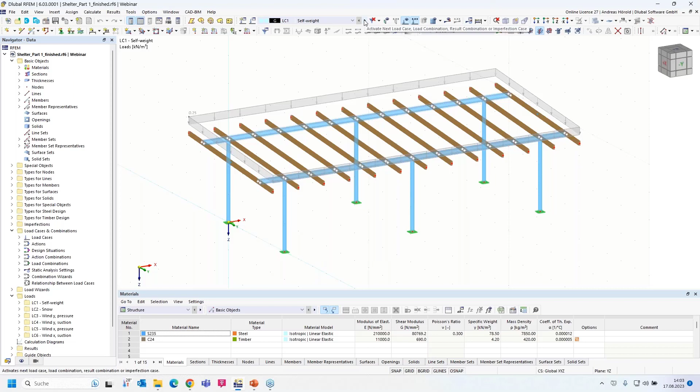Then I open the program. That's the state from the first part of the webinar that we presented last week. I created this model and the different load cases: self-weight, snow, 2 wind load cases in Y direction and 2 wind load cases in X direction. I go back to the base data, what we selected last week.

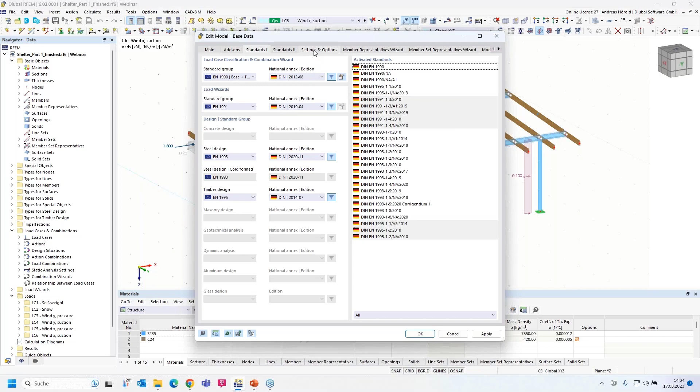I activated the 2 add-ons, one for steel design and one for timber design. Also, the combination wizards are checked, and I selected the different Eurocode standards with the German National Annex. And under settings and options, I activated the member representatives and the member set representatives.

I would like to design only one representative, for example, and all members that have the same properties, the same length, for example, same cross-section, are collected in one representative, and I design only one of them. So in the member representatives wizard, all steel and timber design properties are checked, and the same for the member set representatives. Okay, I'll leave the dialog and I start with applying the imperfections.

On the left side, you can see the navigator data and then the folder imperfections. At first I have to select or create an imperfection case. I can do that with a right click and then new imperfection case. The imperfection case collects the imperfections. After the creation of the imperfection case, I need to create the imperfections. The main advantage of the imperfection case is that you can create a group of imperfection cases. That's, for example, necessary for buckling design according to the GMNIA method. And that's the main advantage.

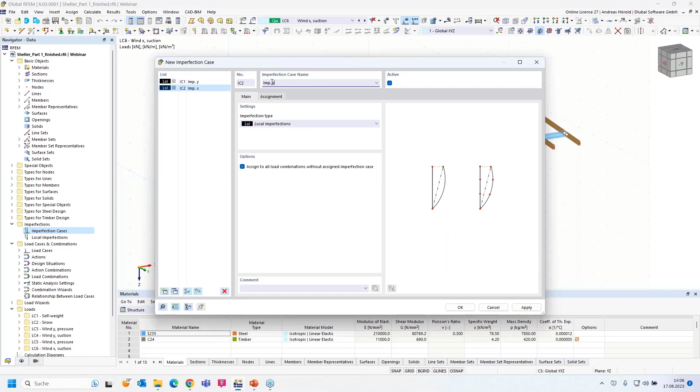So I create the imperfection case imp y and assign this imperfection case to the wind load cases 3 and 4, the two load cases with the same direction y. Then on the bottom left, I check create new imperfection case. I call it imp x and assign the wind load cases in x direction.

And you can see in the combinations in the background, the combinations are created automatically, and you see only the combinations with wind load cases 5 and 6, and not with load cases 3 and 4 anymore. You can check that here. Same for imperfection y. You can't see any combination with the wind load cases 5 and 6. Only with 3 and 4, and of course the other load cases, load case 1 and load case 2, the snow load case.

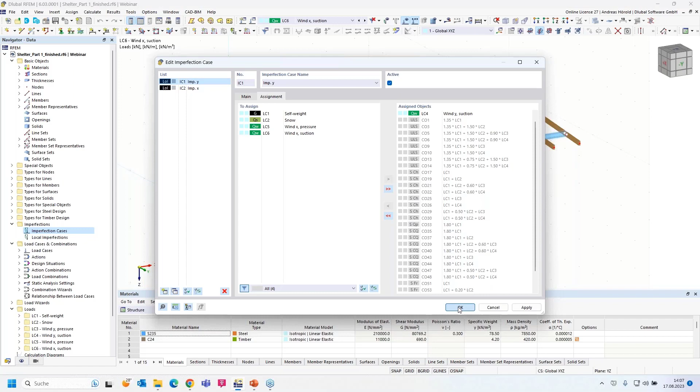Okay, I leave the dialog, and then if I go to the navigator data, I can open the local imperfections, and for example under the folder imp y, I can create a new member imperfection. With a right click on it, I can select new member imperfection. The other way is to go above here and select the button new member imperfection.

So the right imperfection case is selected. I would like to create an initial sway. I would like to assign the initial sway to the steel columns, and I will use for the steel design the equivalent member method in combination with imperfections and calculation according to second order theory. That's sufficient for the design according to the equivalent member method.

Okay, this definition type, Eurocode 3. So the coordinate system is local. Okay, I forgot to show the member axis systems. I select Y. I know that from the test. So then I measure the structure height.

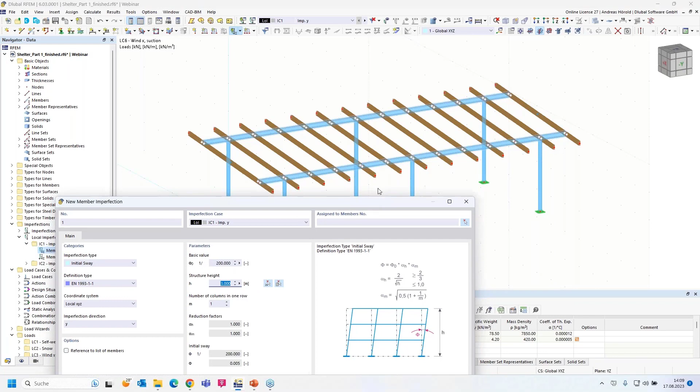Measure. I measure the longer column. Doesn't matter that this column is a little bit shorter. 2 columns should be in one row. This one and this one. And I can press OK. And I need to select the different... Okay, I must go in the dialog again.

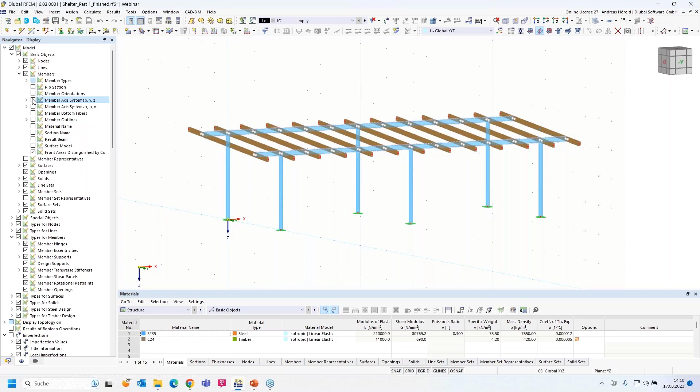But before I do that, I go in the navigator display. And then under members, you can find the member axis system. So now you can see the local member axis system. And now I turn back to the navigator data, double click on the initial sway, and you can see the local Y direction is the same as the global Y direction.

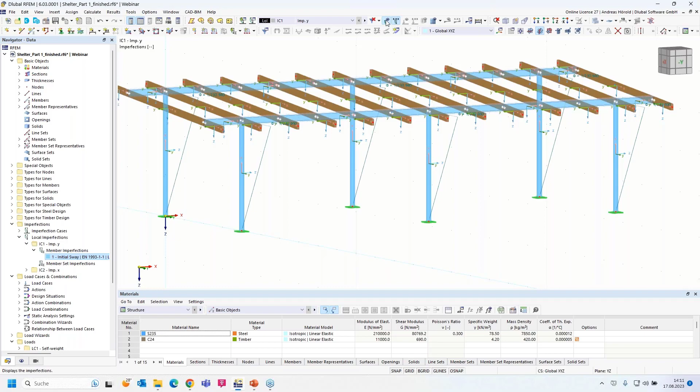So, and I assign the different columns. Okay. And I have to select this button above, show imperfections. So the imperfections are created correctly. Then the next imperfection, new member imperfection. This time I have to select the imperfection case 2, imp x. Again, initial sway according to Eurocode 3.

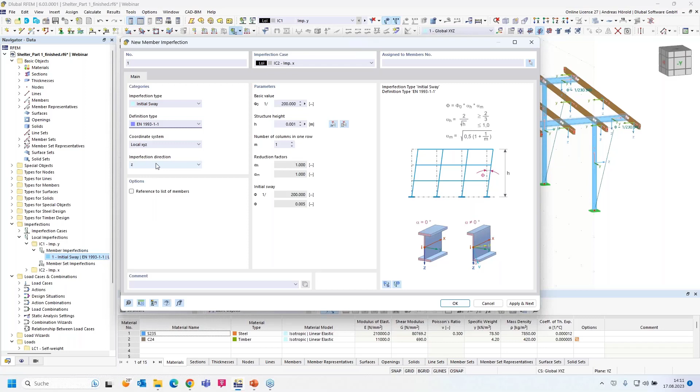This time imperfection direction Z. You can see this is the local Z direction. It's the same direction as the global X direction. Structure height is 3 and 3 columns in one row. Okay, and I select the different columns. So I select the other imperfection case, and you can see that the imperfections are defined correctly.

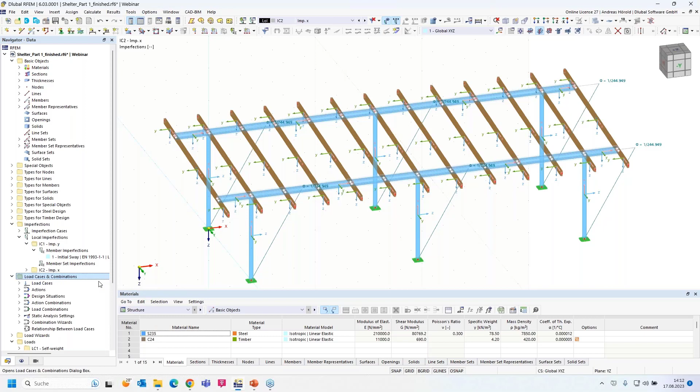Okay, then we can turn to the load cases and combinations. Here on the left side, navigator data. I right click on it and open the load cases and combinations. That's what we defined in the base data, the Eurocode 0 and the German National Annex, and of course the base for timber, because parts of the construction are from timber. And when I edit the parameters of the National Annex, I can see the KDEF factor. It's service class 2 and it's 0.8.

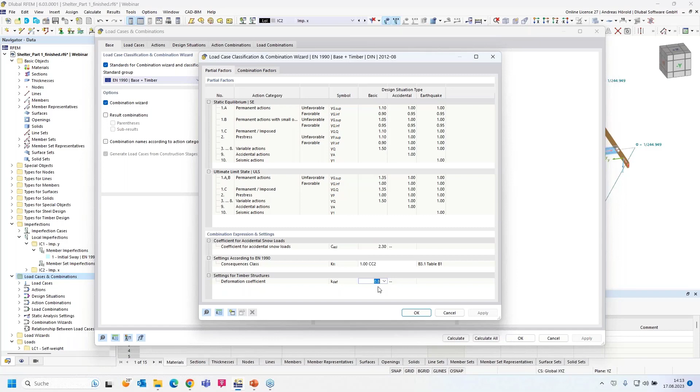Okay, so the combination wizard is activated. Those are our load cases, in the next dialog the actions. And for the wind load cases, it's important that the alternative action type is activated. It's done automatically. You can see the 4 different wind load cases, so that we don't have more than one wind load case in one load combination.

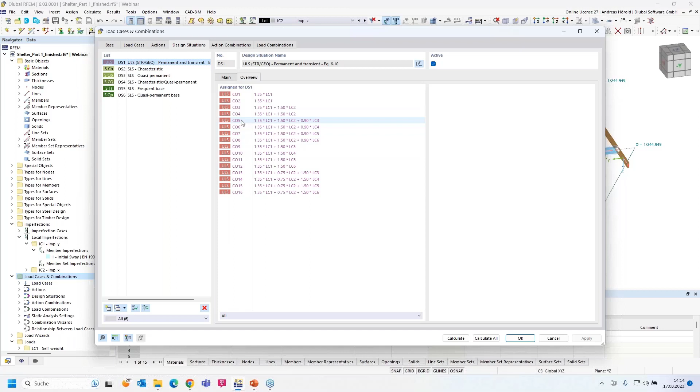Then the design situations, 1 for the ultimate limit state design and 5 for the serviceability limit state design. If you click on one of them, you can go to the overview and see the different assigned load combinations. And in this dialog, you activate the add-ons. You can also assign concrete design. We activate, for example, for the ultimate limit state design, the steel design and timber design add-on. Let's go to the action combinations.

And the important thing, the load combinations for ultimate limit state design and serviceability limit state design. At the moment, we have got 60 load combinations. Let's go back to the design situations. Of course, we will activate the steel and timber design for the ultimate limit state design. For design situation number 2, the serviceability limit state design characteristic, we also activate steel design and timber design. That's all for the steel design.

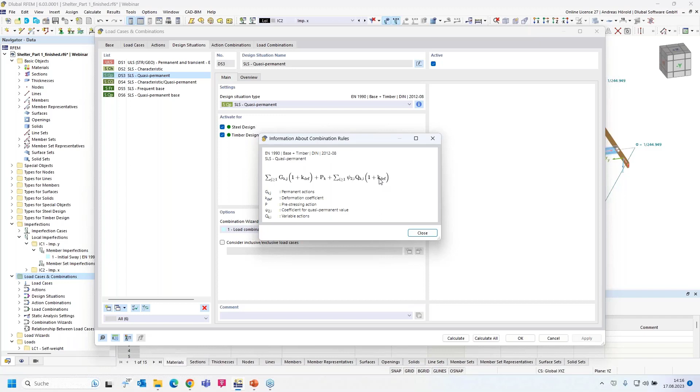And we check if we need this serviceability limit state design quasi-permanent for the timber design. I go to the info button, and you can see in the combination rules the KDEF factor, which is quite important for the timber combinations. That's why we need this design situation for the timber design. You can leave the dialog, uncheck the steel design. We check the same for design situation number 4, information, and we can see the KDEF factor again. That's why we need it also for the timber design.

And we don't need it for the frequent base. And you can't see the KDEF factor here. So that's why I delete these 2 design situations. Okay. So again, this design situation for both, design situation 3 for timber design, and 4 also

for timber design. So with the Shift key, I select the 3 serviceability limit state design situations and check the geometrical linear analysis. And for the ultimate limit state design, the second order theory. Okay. So now we go back to the load combinations, and you can see there are 45 load combinations. Let me check if all is correct. Yeah, all should be correct. So that's all for the combinations.

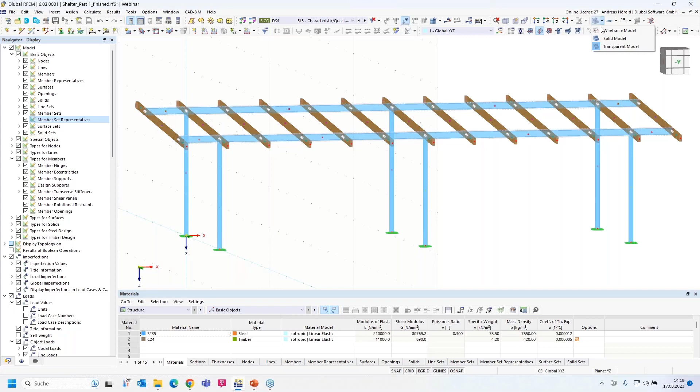I go back to the navigator data. I deselect the member axis systems, but I show the member representatives and the member set representatives. I hope you can see it. I go right above to the wireframe model button. You can see these 3 columns are in the same group. It's the same member representative, and that's member representative number 4. Now you can see that in the different color of the points in the middle of the member.

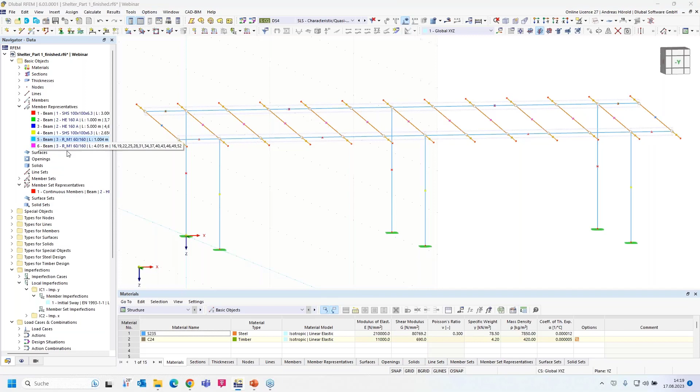So I go left on the bottom in the navigator data to the member representatives and the member set representatives. So that's the timber representatives. You can see that's the cantilever beam, and that's the inner beam here. And I start with this inner beam made of timber. Okay, then I go to the design type. You can see the service class number 1.

That's not correct. I added the service class with that button and change the service class to moist. You can see this preview image. That's what's valid for our structure. You can see the timber structure on the outside, but there's a roof over the timber structure. That's the case for our structure. Okay. I don't define any effective lengths. We don't do stability analysis for the timber beams.

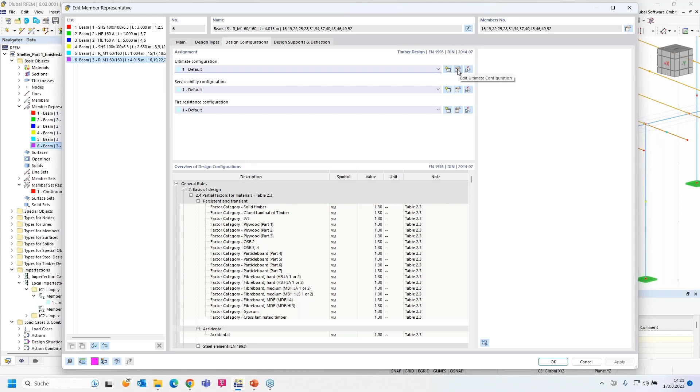I assume that I've got nailed formwork of timber on the upper side of the purlins, or a stiff plate nailed on the upper side of the purlins. And it should be quite stiff. So I go to the design situation, ultimate configuration, select edit ultimate configuration, and I uncheck the stability analysis. Okay, we leave the standard parameters. I apply with OK.

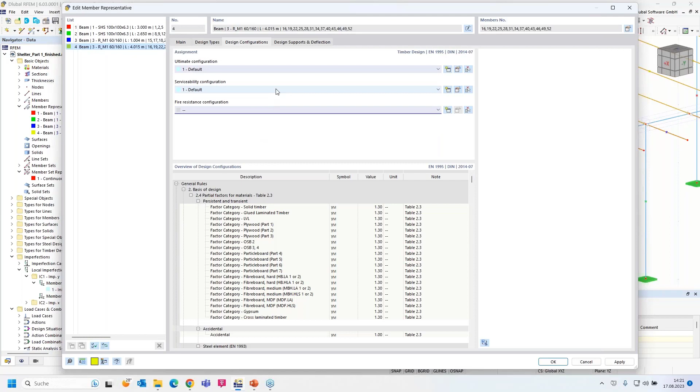So I go back to the design situation and serviceability configuration. I press the edit button, and I leave the parameters from the standard. Okay, and we don't perform any fire resistance design. So the next dialog is the design supports and deflection. Now I have to enter a support at the member start and the member end. I press this button, create new design support for member start. The type is timber.

Direct support. The support length is 160 millimeters. That's the width of the steel beam, the HEA 160. The support width is equal to the width of the timber member. If you change the width of the timber member later, it will be changed automatically. It's an inner support. We do the design only one time for this member and not for the cantilever beam. And we say it's an inner support, so the program uses the complete width of the support, in our case, the steel member.

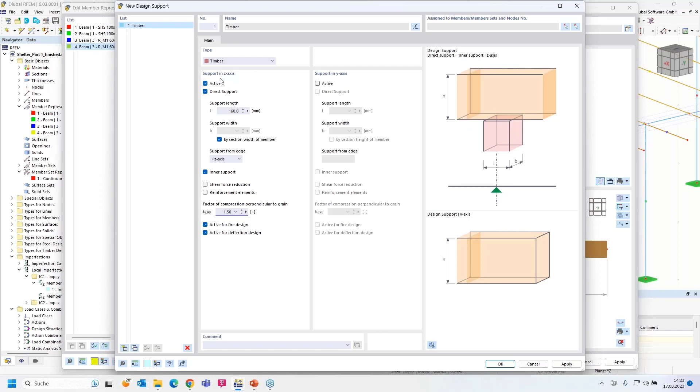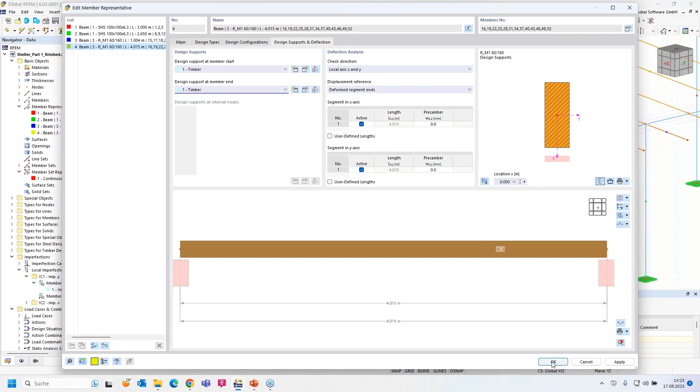So I need to define the factor of compression. I select 1.5 softwood discrete supports. Okay. So it's only supported in Z direction. So the design support should be at the member start and the member end. Okay. That should be all for the timber design, but I check the beam number 3, the cantilever beam.

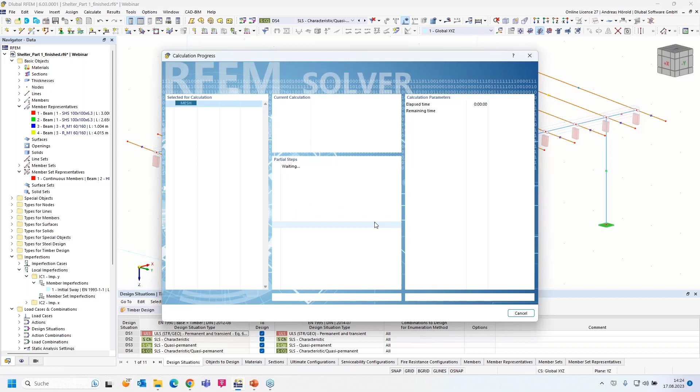Design types, the same service class, 2, the same design configurations, no fire resistance design, and we don't need to define any support. We design the support with the member representative 4. Okay, that's all for timber. I can run the calculation here in the table on the bottom, timber design. And I press this button, show results. And this runs the calculation.

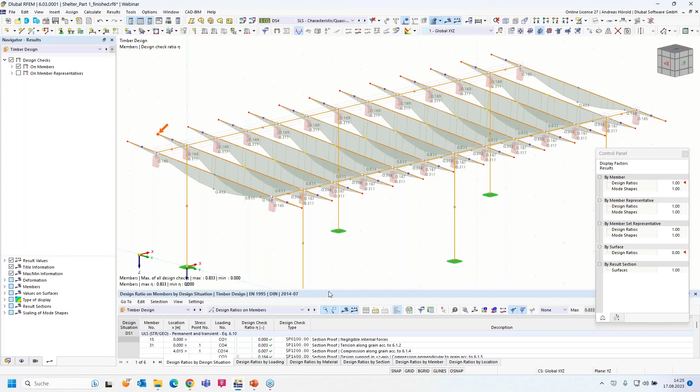The program calculates all combinations simultaneously; it's a new feature in RFEM 6, a multi-core calculation. My computer has more than one core. That's why the combinations are calculated in parallel. So I show the design ratio on members. You can see the different design ratios.

68% for the serviceability limit state design. No, the maximum is 83 for the serviceability limit state design. If you double click on the line, a new table is opened. You can see the design formulas, also the equations from the standard.

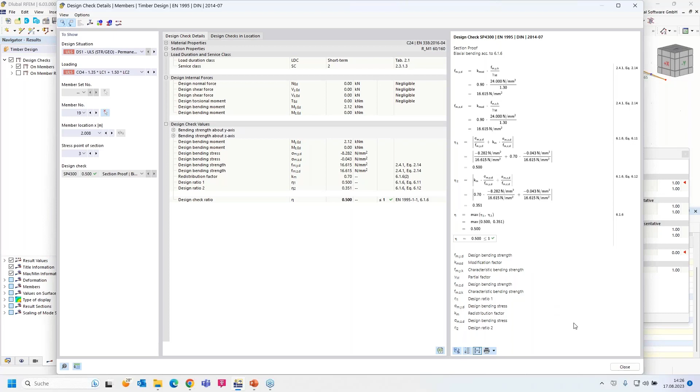Let me select another one, maybe a section proof, for example, this. I can double click on the line, or I can use that button, design check details, and you can see the equations from the standard. Complete design. And you can print it directly with that button, print graphics to printer, and print out report. A very nice new feature of RFEM 6, often wished from our customers, and we implemented it for RFEM 6.

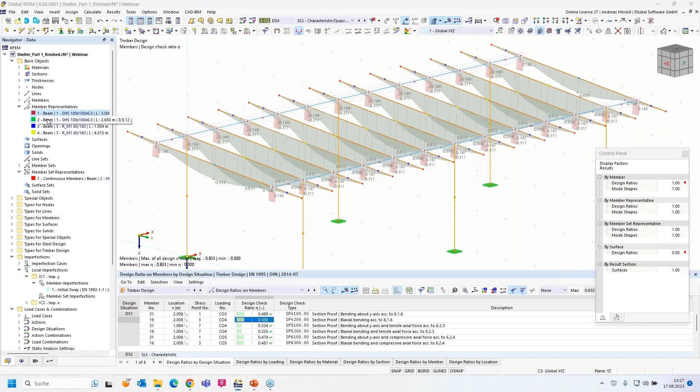So, okay, that's all for the timber design. We continue with the steel design. I select the member representatives 1 and 2 and do a right click, edit. Those are the columns. You can see them on the cross section. Design types. I select the effective lengths. As I already said, I will use the equivalent member method. That's why I have to create effective lengths.

Another way would be to use the general design method. Then you need to define boundary conditions. So I create a new effective length. All the flexural buckling and torsional buckling should be designed. I check all. And I leave the member lengths by 1. The effective length factors should be equal to the member lengths. Because I assigned imperfections and used the second order theory for the ultimate limit state design, that's sufficient if I leave the member lengths to 1. Okay.

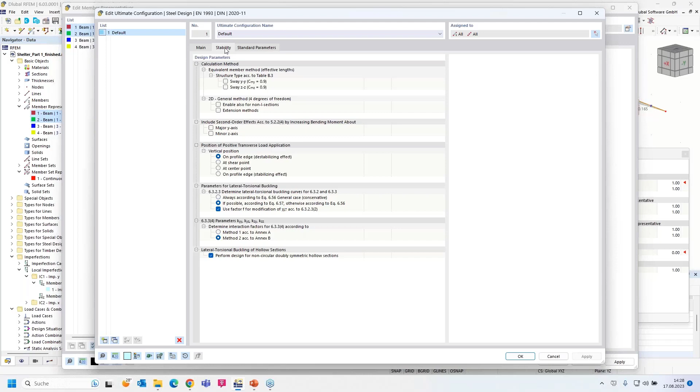So then design configuration, default. I go to the edit button. I perform a stability design and I leave all checks as they are. Apply with OK. Serviceability configurations, let me check it with the edit button. And I leave the standard parameters as they are. Okay. And I don't do a fire resistance design.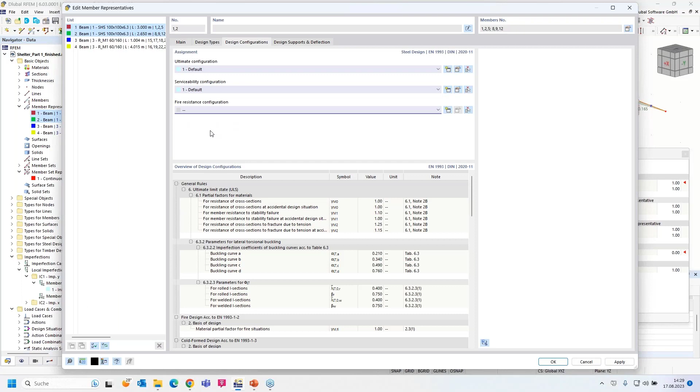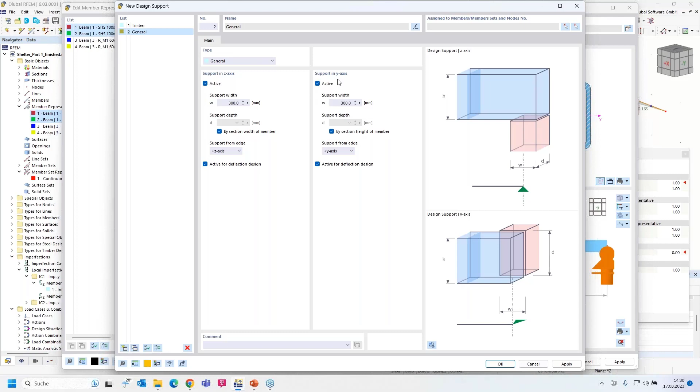So then design supports. I have to create a design support at the member start. I see it as a cantilever column, which is rigidly supported at the member start. So new design support, general support, and I leave all parameters as they are, but I select it for both directions, for the Z axis and the local Y axis. Okay, but only at the member start. You can see that in the preview.

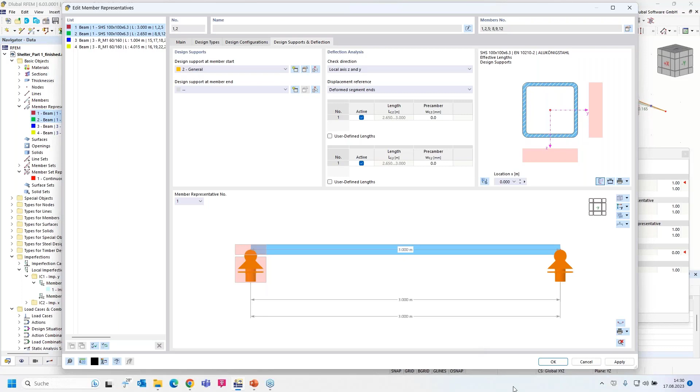So that's all for the member representatives. You can leave the dialog. All results are deleted. And I continue. I deselect the results. So I continue with the member set representatives. These two sets of members are contained. I double click on it. And I can see there are no design tabs here. I leave the dialog

and I select the member sets, or they are selected. I double click on one and I have to set this check here, design properties. Now it would be also possible to enter here the design types, the design configurations, and so on. But I will use the member set representatives. I'll leave the dialog. Double click on it. Select the design types. I will use the equivalent member method again. Create a new effective length. Nodal supports and effective lengths.

And with this button, I select one set of members. And I can see there are only 3 inner nodes. And that's not correct. I leave the dialog. Okay, I can see only 3 nodes. We check why. As I copied the purlin in the first part of the webinar, the member wasn't divided, and now this node is missing for my set of members. So I'll correct that.

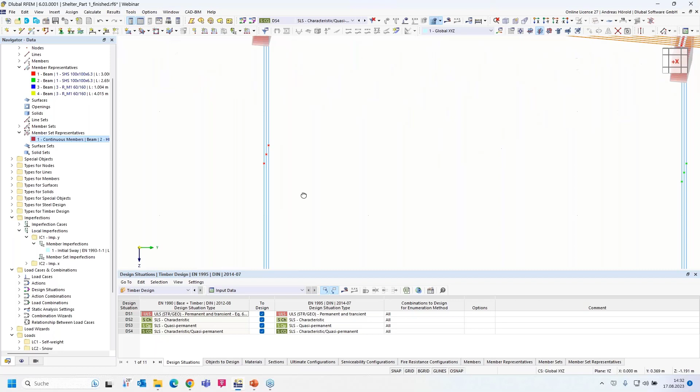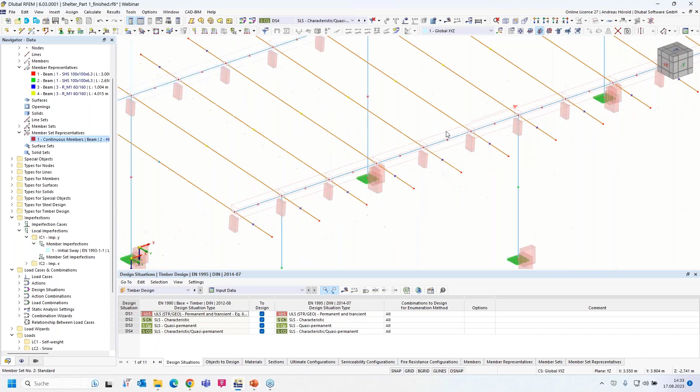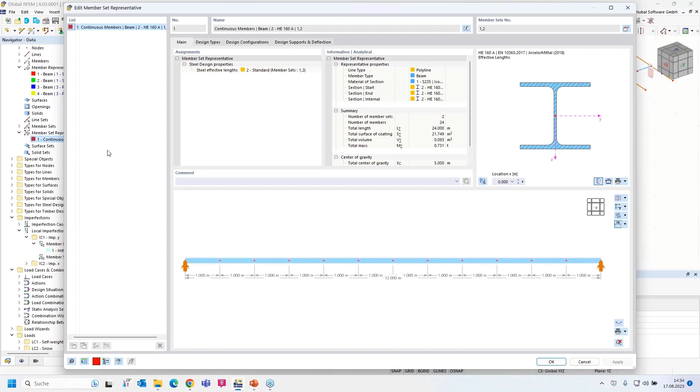I use this function here right above, connect selected lines, members, and so on. I select it. Okay. And select this member and this member. Okay. And now the member is divided. There are only members with a length of 1 meter, but the member set is still the whole beam, or all the beams are collected in 1 member set. Same on the other side. Okay, I turn back to the member set representative, double click on it, turn to the design types, and I edit the effective length.

Click on 1 member set again. So now our inner supports are here. I can open the preview here on the bottom. You can see the 2 member sets. And now I can select more than 1 node and assign the different support directions and so on.

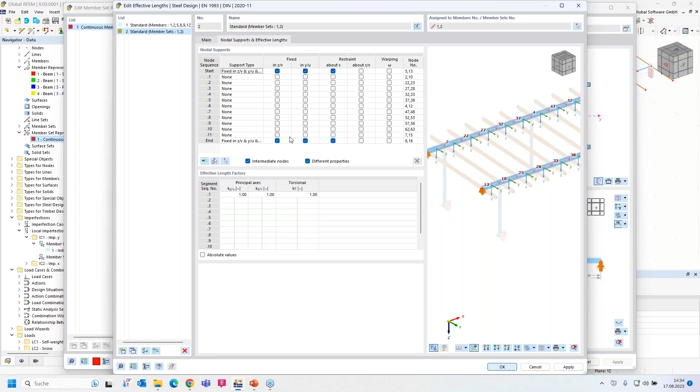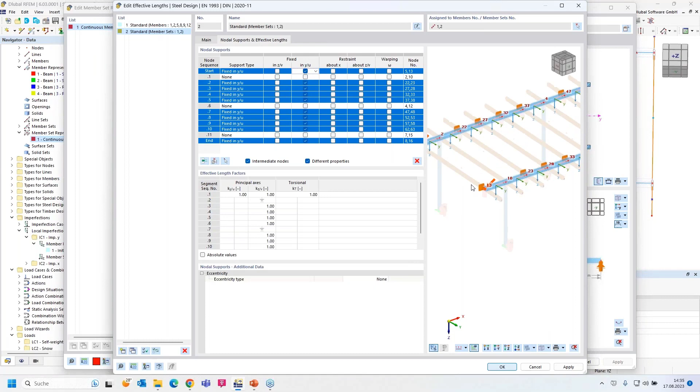So I can use that button, select nodes. I do that for only 1 set of members. So this node, these inner nodes, these inner nodes, and this node. Okay, all are selected, and I check only the support in Y direction. You can see in the preview that this is okay.

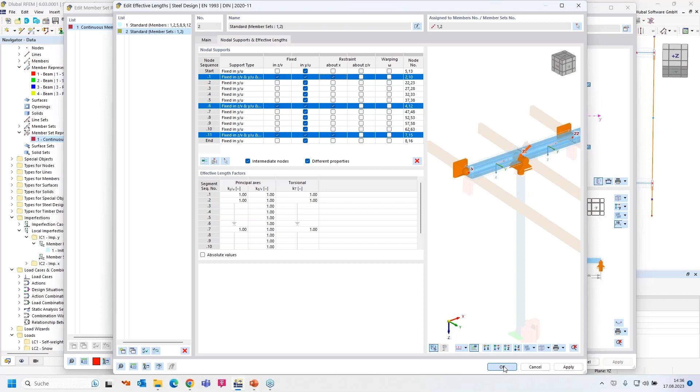And now I use this function again, select nodes. I select this node over the column, the 3 nodes over the columns. Okay, it should be fixed in Z, Y direction and about the X-axis. Should be a fork support. So, and now all is correct for both sets of members. And we collected them in one member representative. I can leave the dialog with OK. And you can see in the preview again that all is defined correctly.

So then design configurations. We leave the same configurations for the ultimate limit state design and for the serviceability limit state design, and we don't perform any fire resistance design.

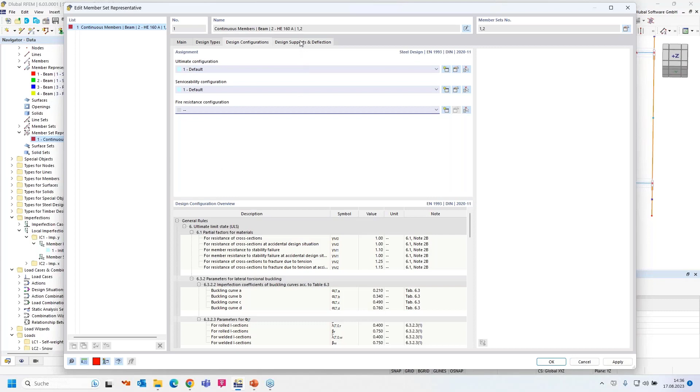Okay, then we have to define design supports. At this point, use the general design support in this point over the column and in this node over the column. And we check the direction. The serviceability limit state design should be performed only in Z-axis, because we have the stiff purlins and plates on the upper side of the cross section.

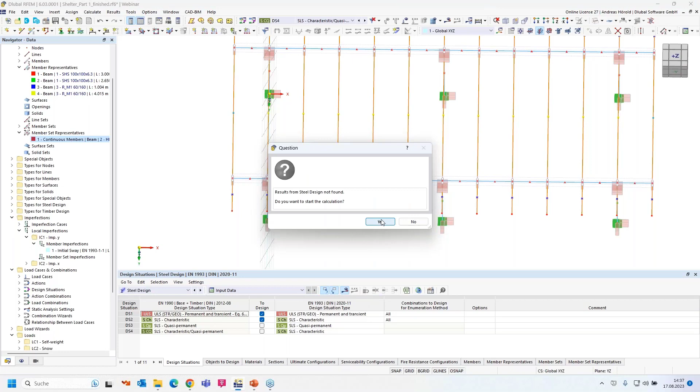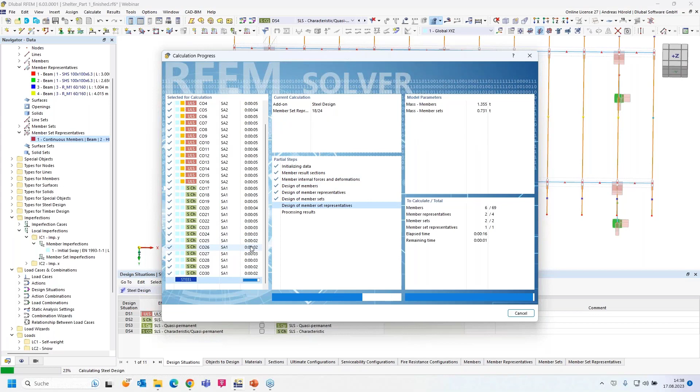Okay, that's all. We can leave the dialog and run the steel design calculation. Press this button here on the table. Okay. All load combinations need to be calculated again, but with the multi-core calculation, that's no problem. Okay. Now you can see our results for the steel design.

Let's go to the table, design ratios on members. So the maximum value is 49%. It's the deflection in Y direction, global Y direction for the column. Okay. So let's select design ratios. Oh, just a moment. Design ratio on members, it's okay. By cross section, let me check. I can do that with the member representatives. Design ratios by section. That's the column.

Okay, and member set representatives by section. That's the horizontal beam, and you can see the maximum design ratio. It's about 25%. I think a smaller cross section is sufficient. Let me go back to the navigator data. You can see the sections here. And I can right click on the HEA 160 and edit it. Now with that button, I go to the library, then standardized I-beams, H-beams, and then HE 120A should be sufficient.

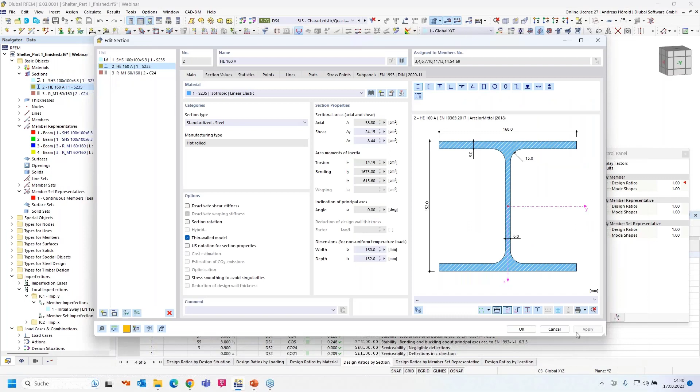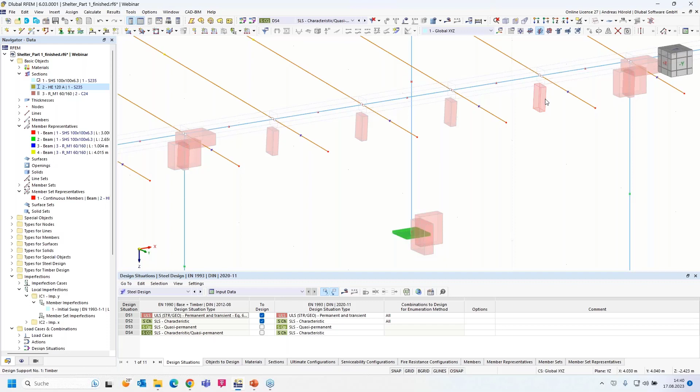So that's all, but you need to consider that we need to modify the design support, because the support length isn't 160 millimeters anymore. Now we have got 120 millimeters. And it's now correct for all design supports. Okay, then we run the calculation again. With that button, you can run all calculations, the load combinations, design situations, and the steel and timber design in our case.

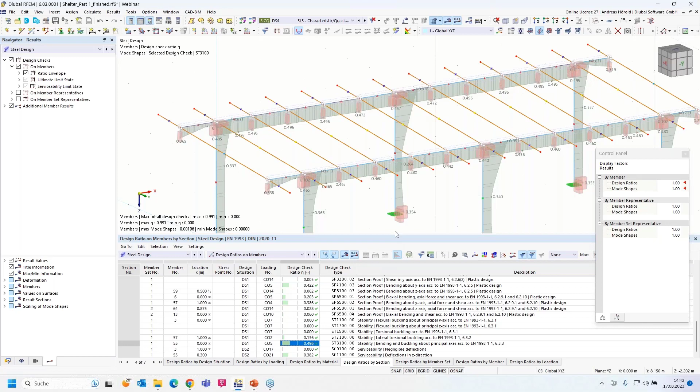So then let's check the design ratios. Steel design. Here, design ratios by section. The column, almost 100% for the serviceability limit state design, and the horizontal beam has got a design ratio of almost 50%. Maybe we can optimize the horizontal beam, but I leave the construction as it is. So, okay, that's all for the design.

Now we will create a printout report. At first, I would like to print the steel design graphic and the timber design graphic in the printout report directly. Let me switch off the design supports. I turn to the navigator display.

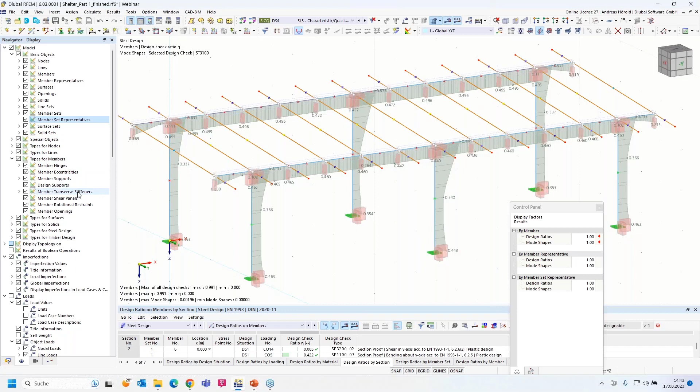And sometimes you can't find any part of your structure if you want to deactivate it or to disable it. Then I have got a tip. When you do a right click, for example, on the design support, then you check the display properties. So those are the properties for the design support. But what I need is the structure of the folders. Where can I find the design supports? You can find it under the types for members. And it has got nearly the same structure as in the navigator display. You can leave the dialog, types for members, and you can see the design supports, and I can uncheck it.

So, okay, let me print this graphic. Left above, you can find this button. You can print the graphics directly to the printer, to a PDF, or to a 3D PDF. I use the function print graphics to printout report.

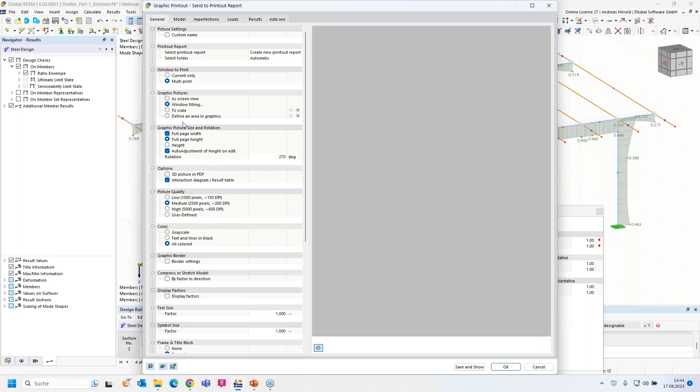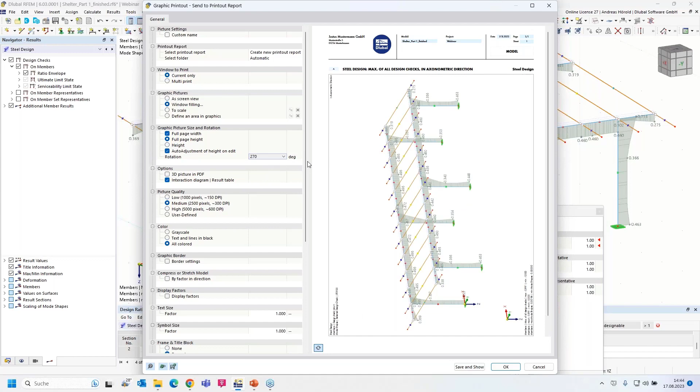I check current only. It's already rotated. That's 270 degrees. And I would like to rotate it clockwise, 270 degrees. Okay. I press OK. And now the printout report manager was opened. I have to enter a name, printout report 1, and can check the different report items.

Let me go through them. I leave the first entries. Maybe we check the loads for the different load cases. That's quite new in RFEM 6, the parts list. Let me print some parts lists. So we leave the static analysis results. Then there's the folder for the steel design.

Let me increase the window. That's also a new feature of RFEM 6. And I would like to print only the design ratio on representatives by section. So I uncheck the others. Okay. And design ratio on member set representatives by section.

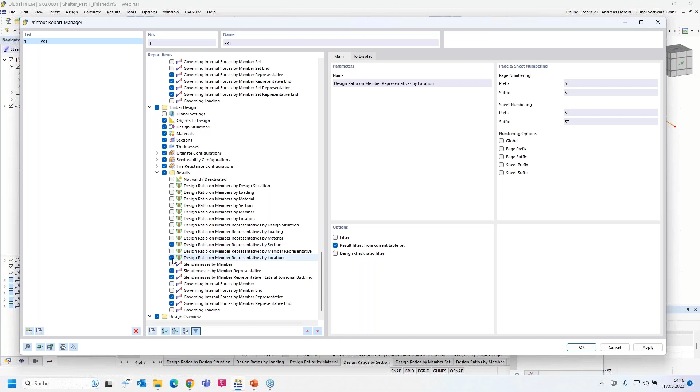Then timber design, the same. Design ratio on member representatives by section. That's sufficient. We can leave the dialog. We don't open the printout report; parts of it were created. We print the next graphic manually. Here, timber design, left above, and the navigator results. The ratio envelope. So I move it a little bit and go above to print graphics to printout report. Same workflow, same rotation.

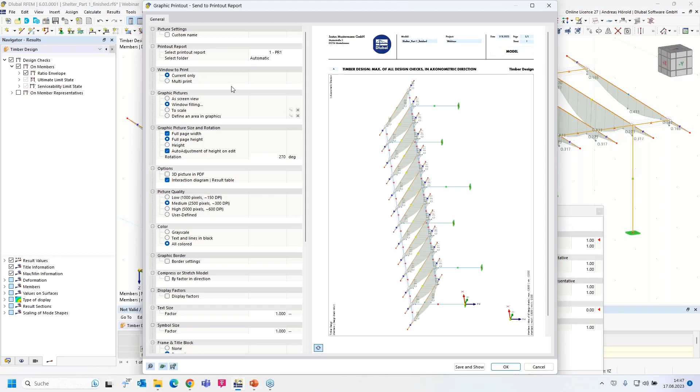And now we would like to use the isometric view for a multi-print. I select print graphics to printout report again, and I select the option multi-print. And now you can see different dialogs on the top. Model: we would like to print the isometric view of the model, the current view. Then imperfections: I select them all, means 2 imperfections, the current view. Loads: not all items, I select the 6 load cases.

Current view. You can also check other views, in our case without imperfections. That's only an example. You can print what you want, but I would like to show you how you can print several graphics in one step. So load cases and combinations. I remove the load case with that button, and I select only the design situation number 1. Okay. Current view.

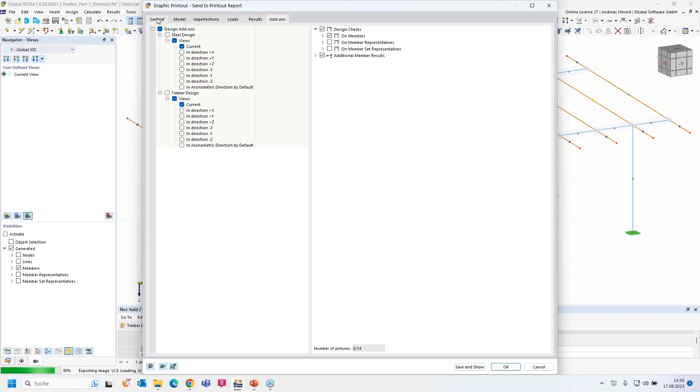Members, internal forces, only as an example, N, V, and M graphics. Okay. Now we don't print the add-on graphics. I printed only the 2 add-on graphics manually. And we can see on the bottom that there are 14 graphics. Now if I go back to the general view, you can see the previews of the different pages, the model, imperfections, and the loads.

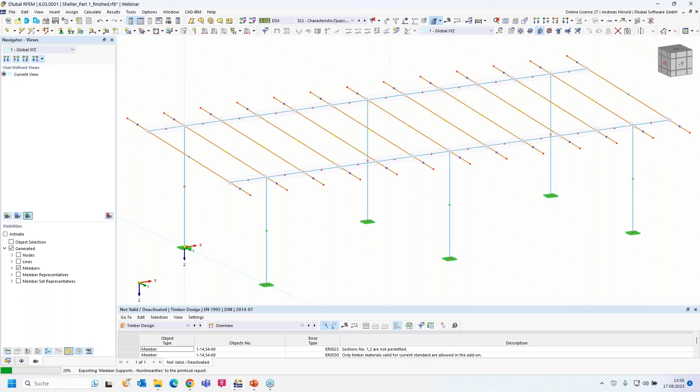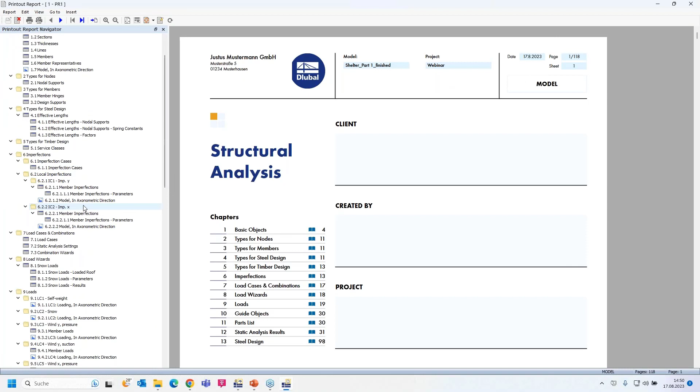Now I press save and show, and the printout report with all graphics is created in some seconds. Okay, that's the printout report. An important new feature is that you can work in the printout report and in the model in parallel. I can show that like this on one screen. So, let me show the different graphics.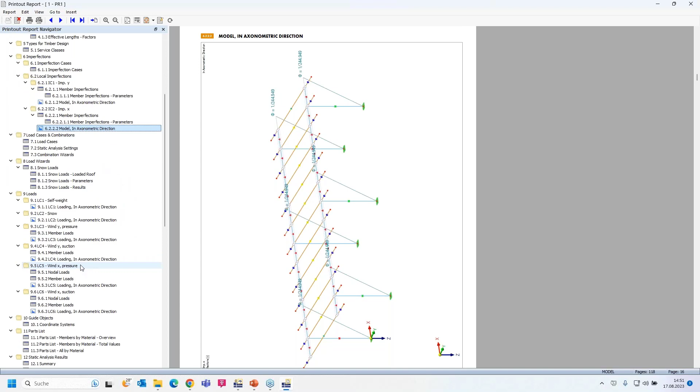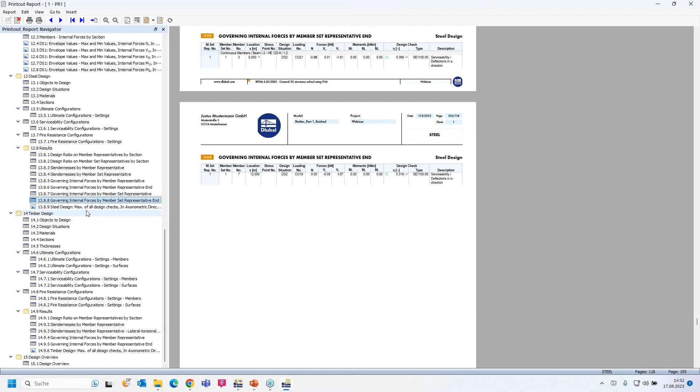They are in the right place: the model under the basic objects folder, then the imperfection graphic under the imperfection case and under the local imperfections. Then the different load cases under the loads. Then under static analysis results, you can see the different graphics, N, V, and M. Under the folder timber design, you can see the timber design graphic. And I skipped the steel design. That's the graphic for the steel design. Before the graphic, you can see the tables with the results of the design.

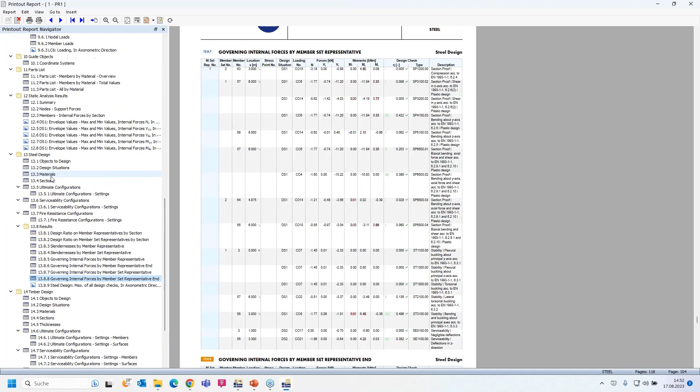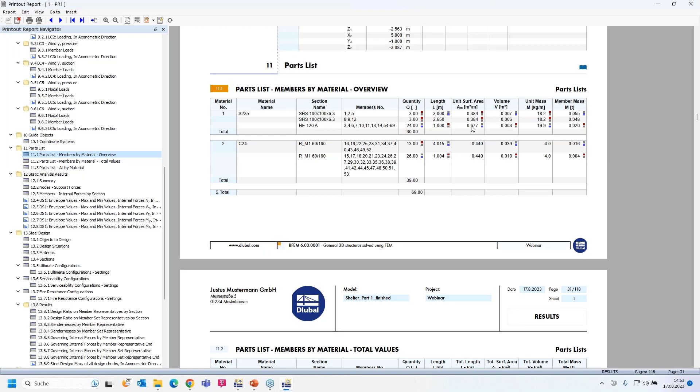Let me show you the parts list. Parts list member by material overview. This graphic. I can zoom in with the control key and the mouse wheel, or with the buttons above, zoom out and zoom in. And you can see the different lengths of the members, the sum of the steel parts and the timber parts, and the sum of the unit surface area, the unit mass, and so on.

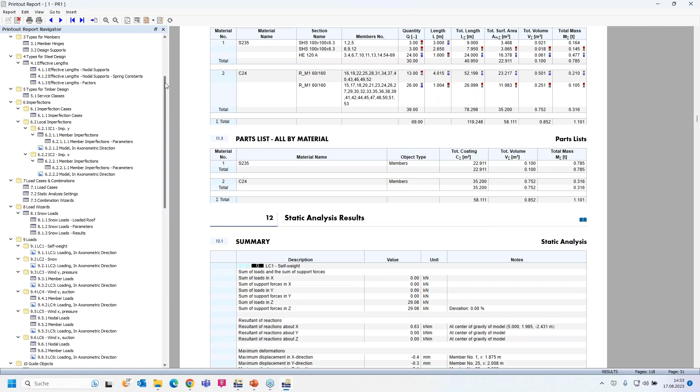Then let me turn back to the cover. It's the start of the printout report. You can modify the cover, you can enter a client and so on. I right click in the menu here, press edit. You can select the preview image or deselect it. I enter a client, John Doe, created by me, Melhore, and the project, we call it roof on market.

So, okay. That should be all, or we don't call it roof, we call it shelter. Shelter on market, okay. So then you've got other settings. For example, you can enter your company name here. You can upload a logo. That's the Dlubal logo. And do a page setup, printer settings, and so on. Okay, that should be all. I leave the dialog. Okay, the value from my printer is not enough. That should be okay. So now you can see the modified cover with the text.

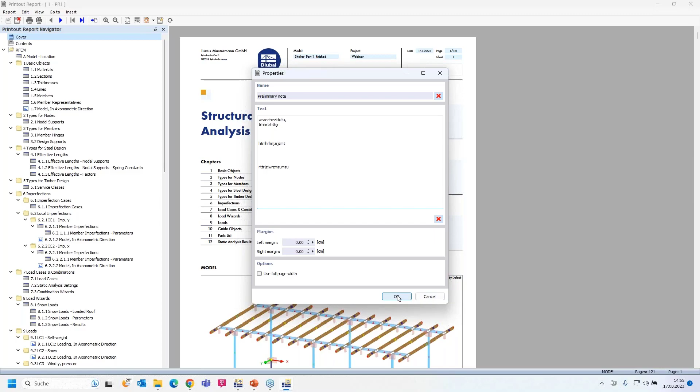So I go to the menu. You can insert different things: a file, image from clipboard, plain text, rich text, HTML, formulas, PDF. Now let me show you how to insert a plain text and a PDF. It's always the same workflow. I insert a plain text. I call it preliminary notes. Okay. Enter imagine text here. Should be okay. And it's added at the end of the printout report.

You can see the preliminary notes. So I move the item to the document start. So that's the content, and you can see the preliminary notes here. Okay, let me go back to it. Oh, it's okay. So you can enter properties, so you can change the text anytime.

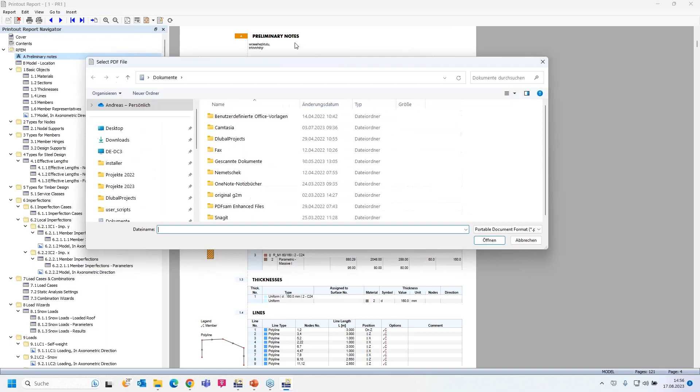Then I insert a PDF. So from my desktop, I prepared a PDF from our Geo-Zone tool. I think you know that from our website. I can enter all pages or a selection of the different pages. So I press the OK button, and then the PDF has been added at the end of the printout report. I can move that, for example, also with drag and drop.

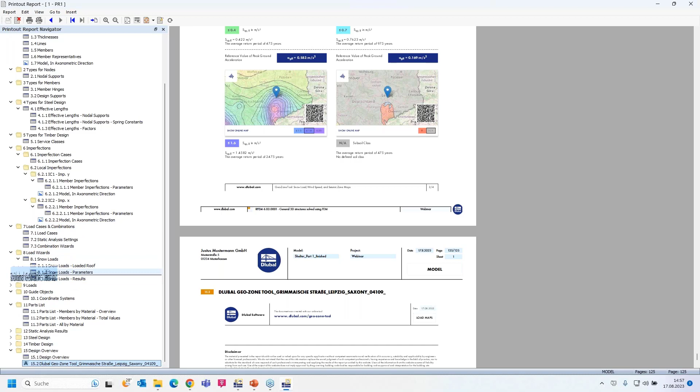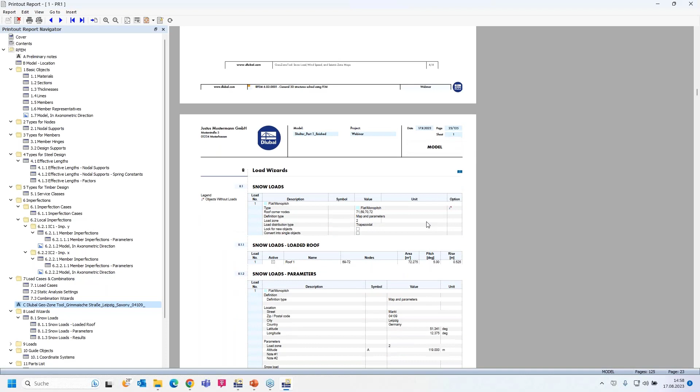Let me do that. I close these folders and I move the PDF before the load wizards. Okay. So now you can see the PDF here. And then the load wizards follows, now also with the location and so on.

Then edit. Okay, that's also quite important. You can set a language. The program can translate the printout report into 10 different languages. It takes only some seconds to translate such a printout report, for example, into French, Spanish, German, etc.

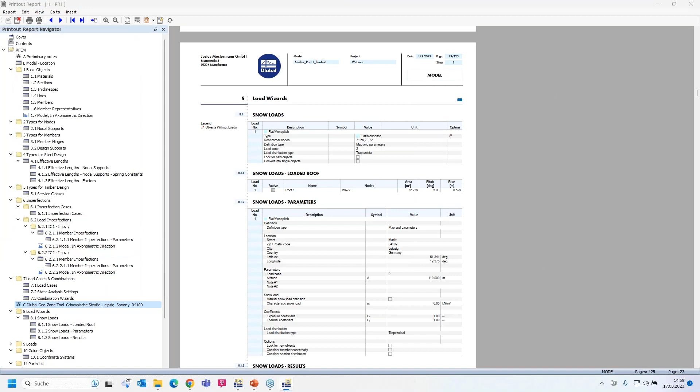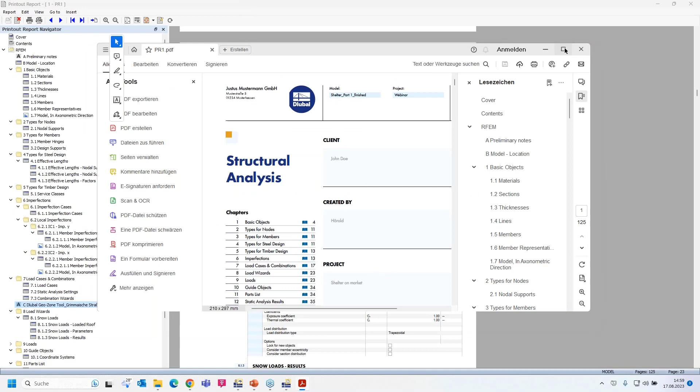Then report. You can print the report directly, or export it to PDF or to HTML. Let me export it to PDF. To my desktop, PR1, printout report 1. I save it. The PDF is being created, and I open it. So, okay. You can jump between the different chapters on the right side. All tables and sheets and graphics are printed in the PDF.